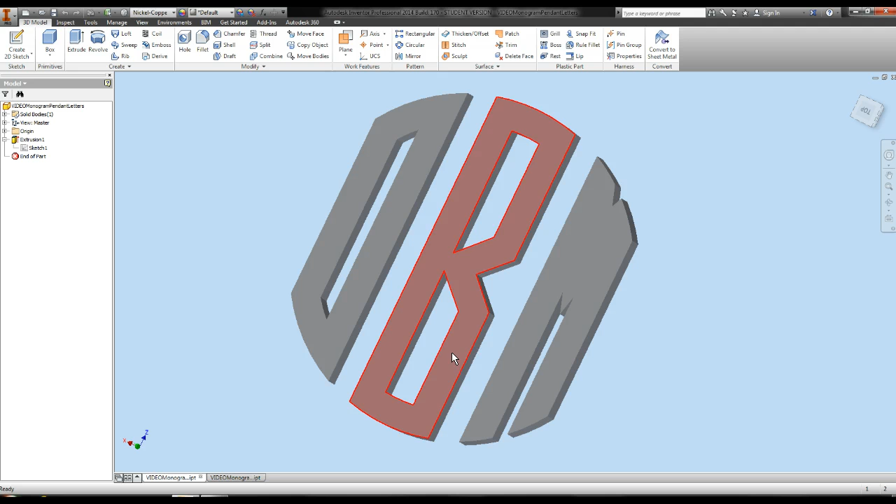I'm going to assume that you've already created your circular base as well as the 3 letters, whether you wanted to create the same letters as mine or use your own. It's up to you, but I'm assuming you have 3 letters made that are ready to be assembled. If you haven't done that yet, there are previous videos on this channel you can check out on how to make those.

Before I go ahead and assemble this piece, I'm going to make the materials of these 2 pieces contrasting materials so you can see the distinction of the letters when you assemble the piece all together. It's also a useful skill to know how to change the material of a part in case you're trying to make it look more aesthetically pleasing or more realistic.

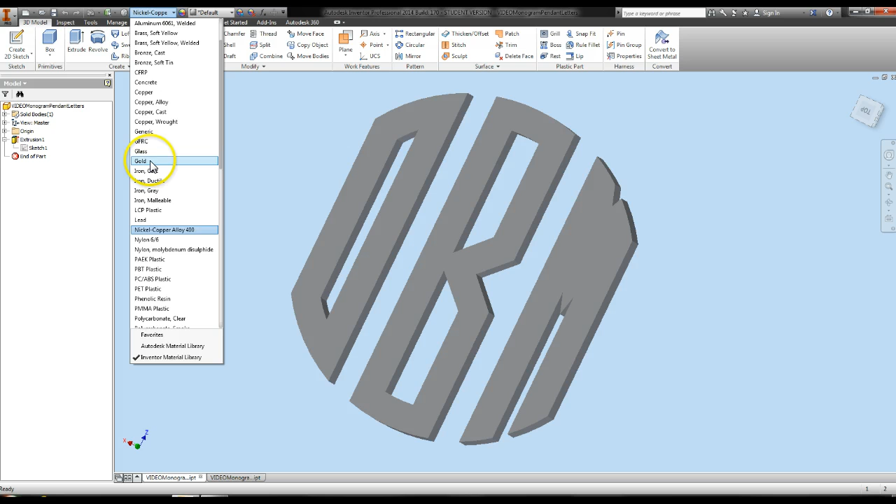The way you do that is you go up right above the main ribbon we've been using. There are these 2 pull down bars. Right now this is what's called default - actually, it's the other part that's default. Usually it's set to generic, which is what most sketches will be created in.

For this top part, I'm going to make it a shiny nickel copper alloy. As you can see, nickel copper alloy 400. You can select whatever you want, as long as they're contrasting so you can see these letters once they're put together. I'm going to go ahead and change the color as well.

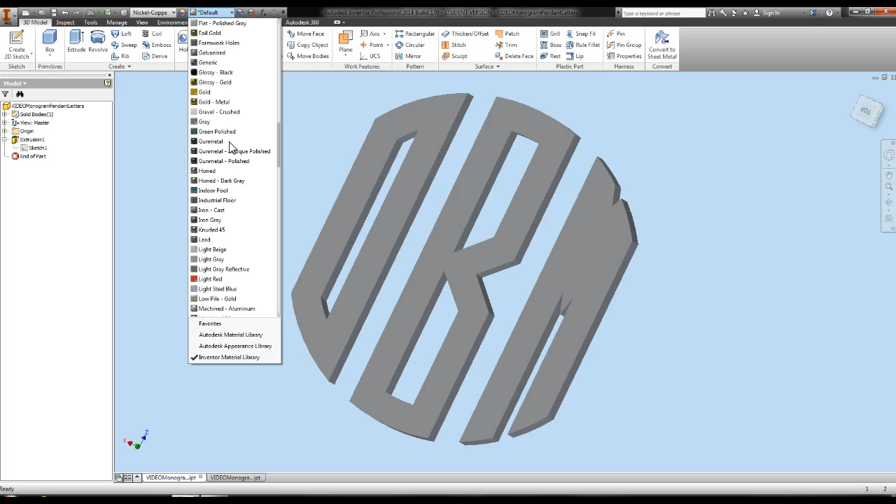I'm just going to pick one. I wanted something for the top that's going to be shiny looking in a way. As you can see, as I turn it, it gives you that realistic reflection. For some reason the software always reflects kind of the image of trees for whatever reason.

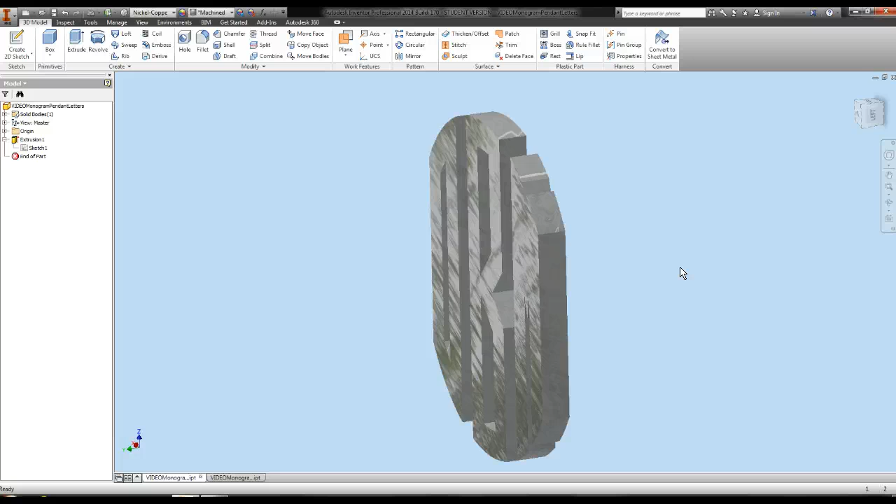Then I'm going to go over here to the base plate. If you didn't already have that open, you can just pull down the iPro as I showed in the introduction video and open that file wherever you saved it.

I'm going to go ahead and change the material of this. I'll go up again right above the main ribbon, select the first pull down, which is the actual material, and select a wood. As you can see, you have so many options - there's rubber, silicone, all these different options for what material you want to make.

I'm going to make mine a maple. Again, it's sticking to that default color. I'm going to make mine something that really stands out, so I'm going to use Cadet Blue. As you can see, it's this nice turquoise color.

So now we have both of our parts in very distinctive colors. We're going to want to go ahead and open up a new standard assembly.

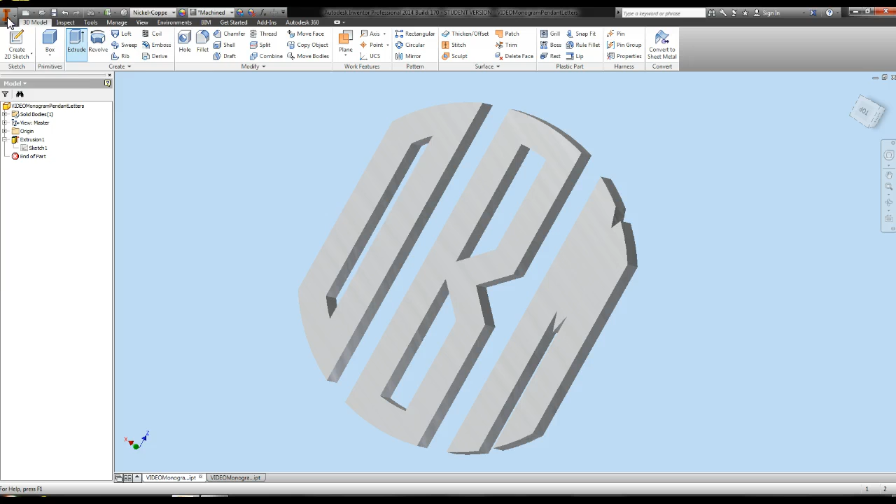We can go up to the iPro bar, press open, and we get this open window. Actually, I'm going to say new because I want to open up a new assembly, press standard, and suddenly we get this new assembly screen.

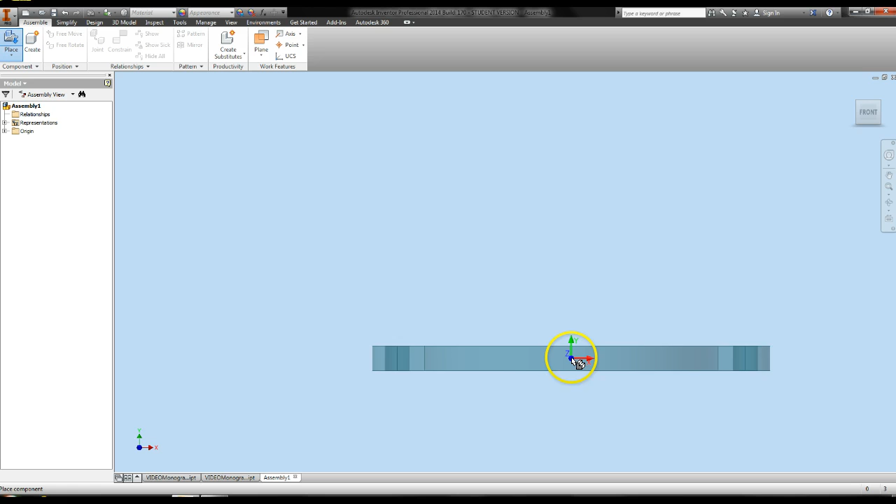When you're placing parts into assembly, the first part you want to place is your base, the piece that's not moving. If you have one, you have to sit down and think about which piece that is, but for us we're going to lay down the base because that makes most sense. I'm going to press place, find my base, and press open. As you can see, it's giving me an image of where it goes.

Before you place it, right click and say place grounded at origin. That way the origin of this assembly and the piece as you designed it in your part match up.

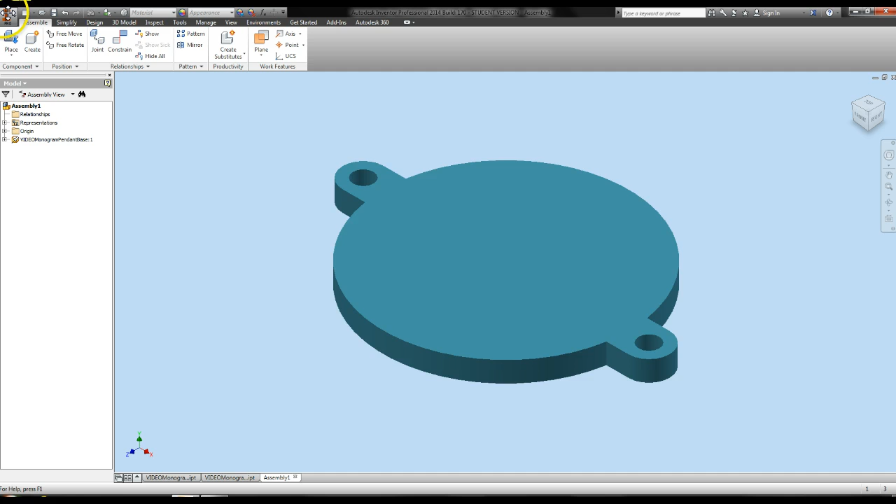Now I'm going to want to place the top part, which are the letters, and say open. I'm just going to place these somewhere over here, and press escape because you can place as many copies of them as you would like.

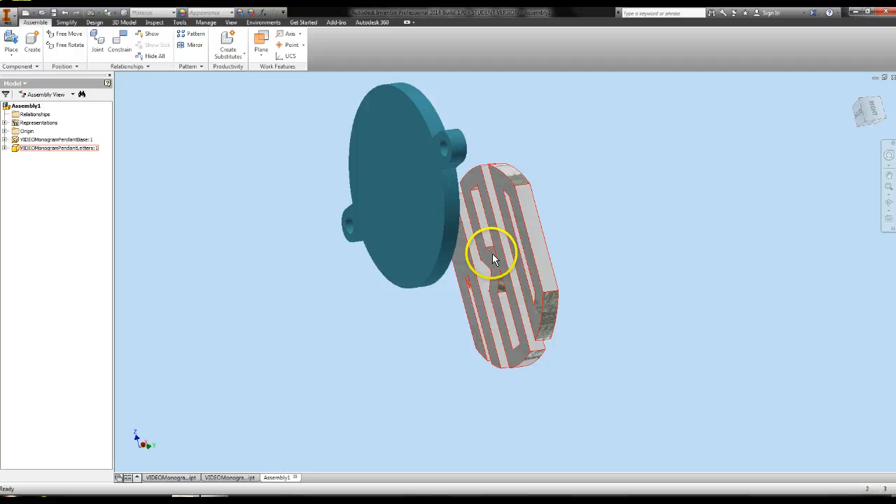Then what I'm going to do is mate this surface of these letters to the base so that they are stuck together as one whole unit. Let me get back to a normal view, there we go.

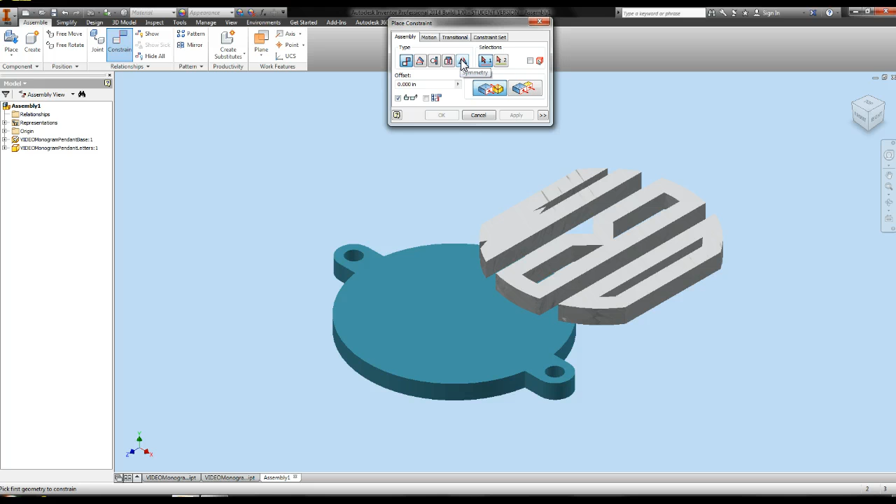You're going to want to go up to relationships and left click constrain. You have numerous options for how you want to constrain things. There's mate, which is the one I use most. You're going to mate center points of certain things, or origins, or faces. You also have angle, tangent, insert, and symmetry, and selections 1 and 2.

First you want to select the first piece of your design that you want to mate, which is for us going to be that surface, but we're actually just going to mate the planes. You can go over to your browser, and as you can see, it has the base and the letters, and you're going to want to open those folders up.

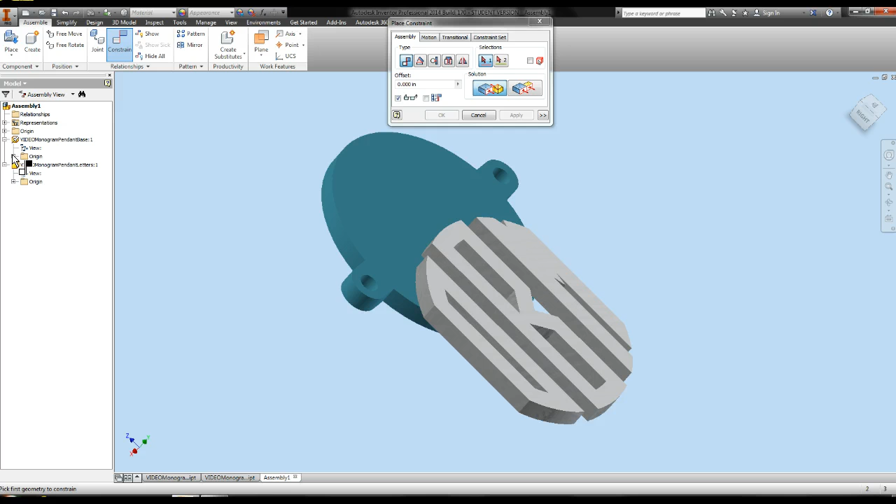We're going to mate, and we're also going to open up the origin folder, and you want to look at what plane you want to mate, and that's going to be the one that you created on. So we're going to mate that, as well as this XY.

As you can see, I'd hoped by how I'd extruded that it wouldn't do this, but it still did, but that's okay. The letters mated kind of inside of the base because we mated the planes, and the planes were located symmetrically inside of those extrusions.

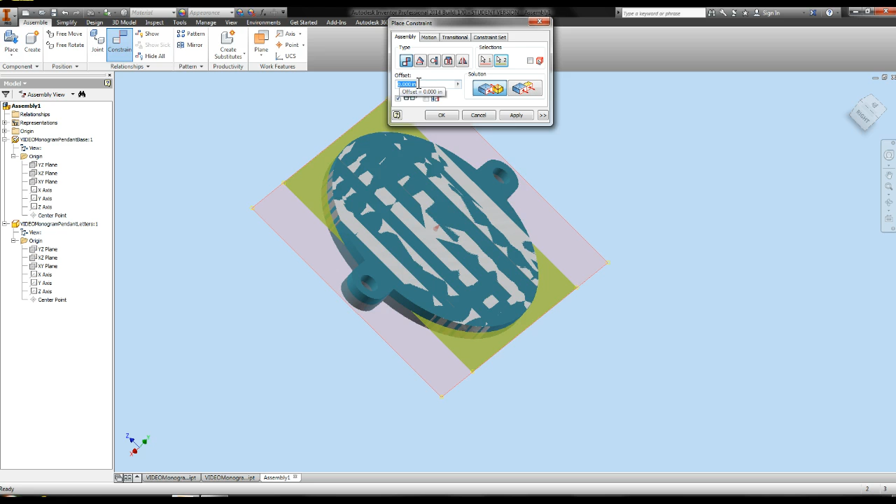So the way we're going to do this is we're just going to offset this mate, which you can see as an option right here, and we know the thickness of the base is 0.125, so we know that's how far up we want our letters to be. I'm just going to type that in and press OK.

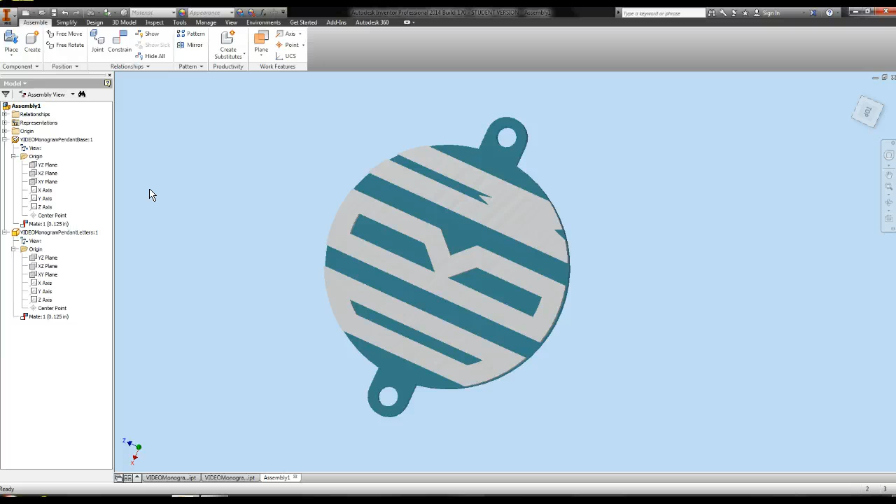I'm just escaping out of that constrain function since we're done constraining this. Oh, and for whatever reason, this was mated on the wrong side. So actually what I'm going to do is...

Edit this. So I went over to my browser. Mistakes like this are going to happen. The most important thing is for you to know how to fix them. So really, I should have offset this in the other direction.

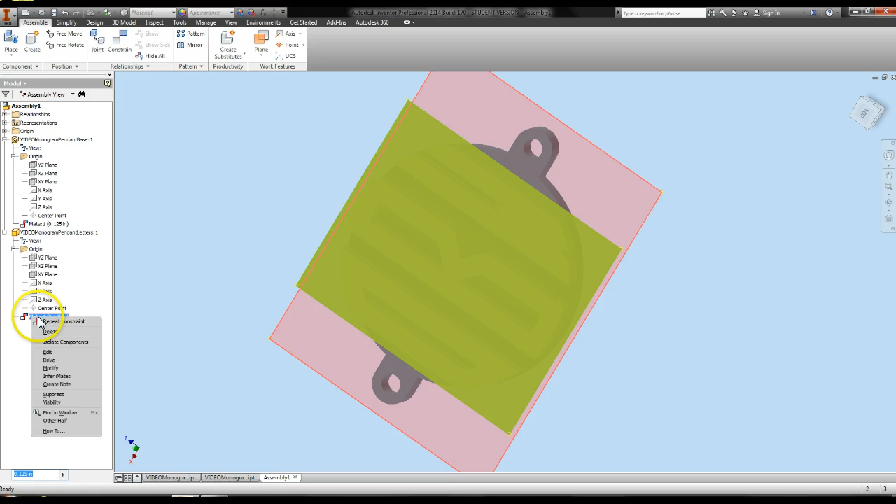I'm going to right click this mate because that's the mate we just made, and then left click edit, and then I'm going to make this negative, so it's offsetting in the other direction, and press OK. When we turn this around, it should be, yep, in the direction we wanted.

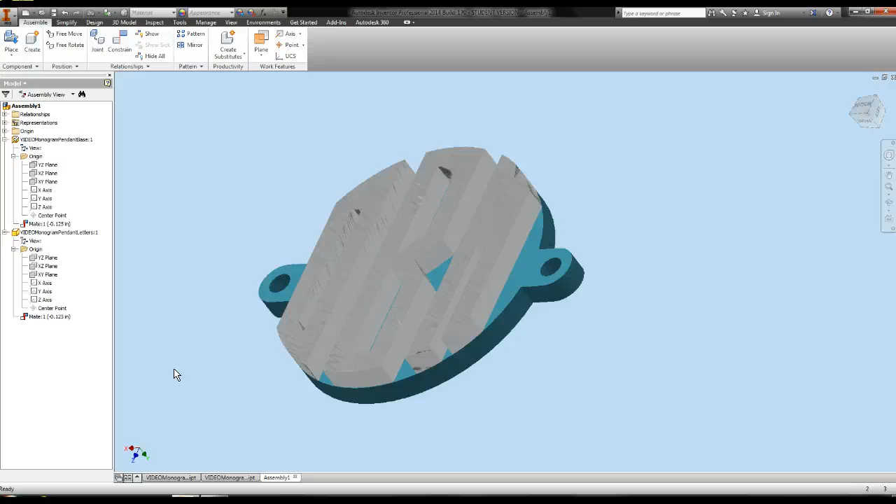So this is the final pendant piece. If you would like to print this using your 3D printer, what you're going to do is go up to the iPro bar, left click export, and then left click...

Left click CAD format, say that 10 times fast, and this is a generic saving screen that's going to pop up, and you can name it whatever you want. You can name it Final Monogram Pendant 1.

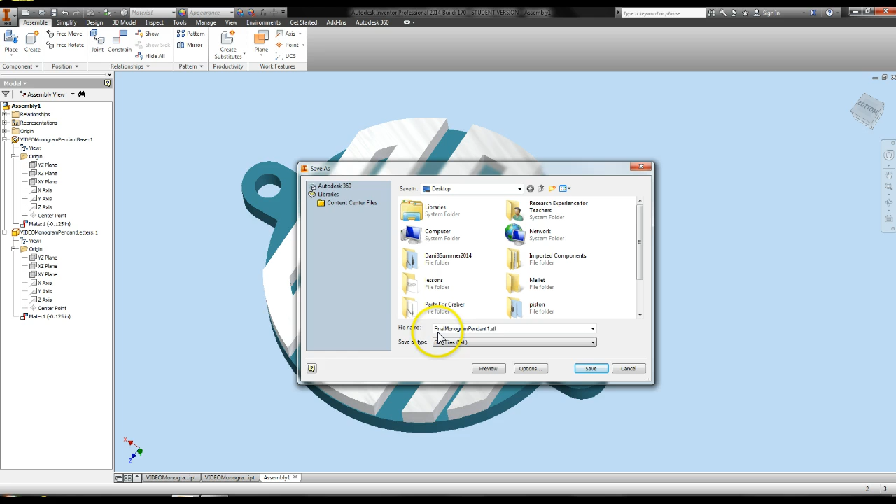Then if you're going to be printing, you want to export this as an STL file, which is right in this save as type dropdown bar. And then you're just going to want to save it, and then go ahead with the instructions to print from your 3D printer.